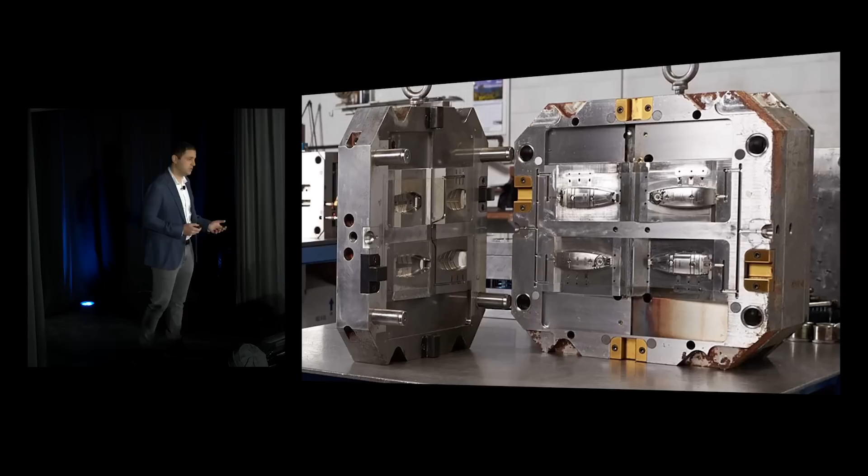I think it comes down to tools. This is an injection molding tool, and it's representative of a lot of tools in manufacturing. It's a big chunk of steel. It costs many thousands of dollars to make one. It takes many weeks. And you have to do all that before you even get one part out of it. Then if you want to change that part even a little bit, you've got to repeat that cycle, spend a lot of money, take a lot of time.

And so that inspires a conservatism to the world of making things. There's this phrase, measure twice and cut once. And that makes a lot of sense. If you're cutting a big chunk of steel like this, you want to get that right the first time. And so the whole culture of making the physical world is built around preparation, refining your idea, and all that before you make even a single thing. And that's a problem. I think this prevents us from making bold choices and moving quickly.

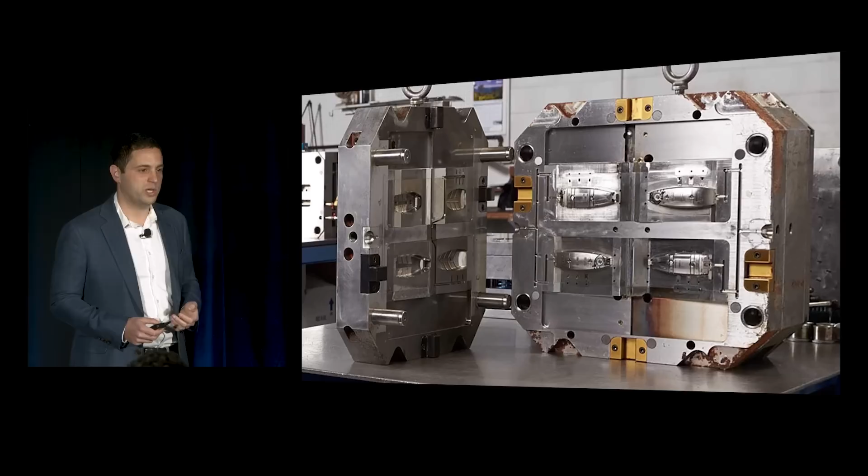In contrast, in software, the tools are very different. They're fast, reliable, low cost. You don't think about trying a line of code. You just run it. You don't think about changing it and iterating it the way you think about measure twice, cut once. In software, you do almost the exact opposite. You will often write two versions of something, ship them both, and then see how they perform with customers. It's called A/B testing. It's almost a complete inverse of measure twice and cut once.

So you might say, okay, well, software, hardware, they're different worlds. This makes sense. But I don't think they're so different. In both software and hardware product development, you're trying to do roughly the same thing. You're looking out into the world, finding a problem that needs solving, designing a solution, engineering it, bringing technology to bear, refining that, and shipping it. So how come we end up with this completely different paradigm?

I don't think it has to be that case. I think it's because of these tools. And if we had tools that let us iterate quickly and were reliable and produced the output that we expected, and we didn't have to worry about trying things, we could see some of these benefits.

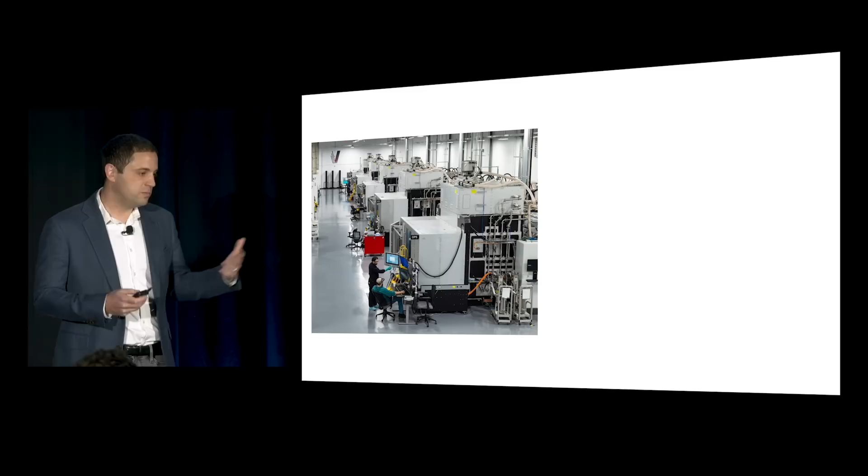So we set out to build something different, and that's why we started the company, to build the tools that make it possible for anyone to bring their ideas to life. And we've been working on this since the beginning.

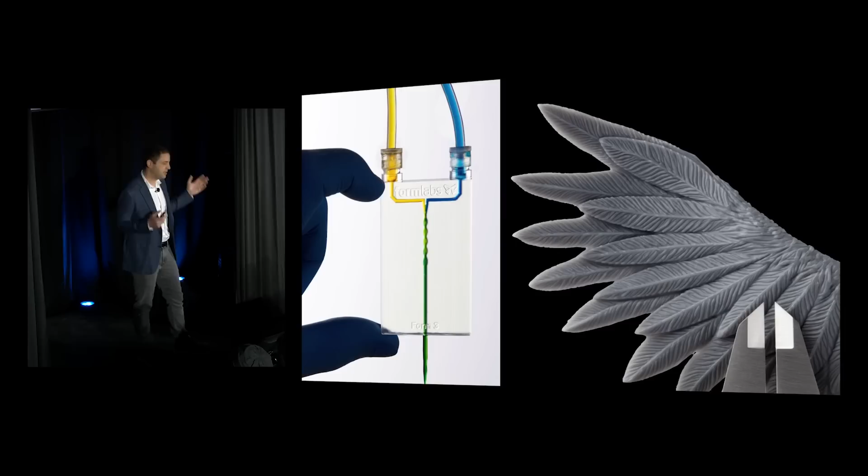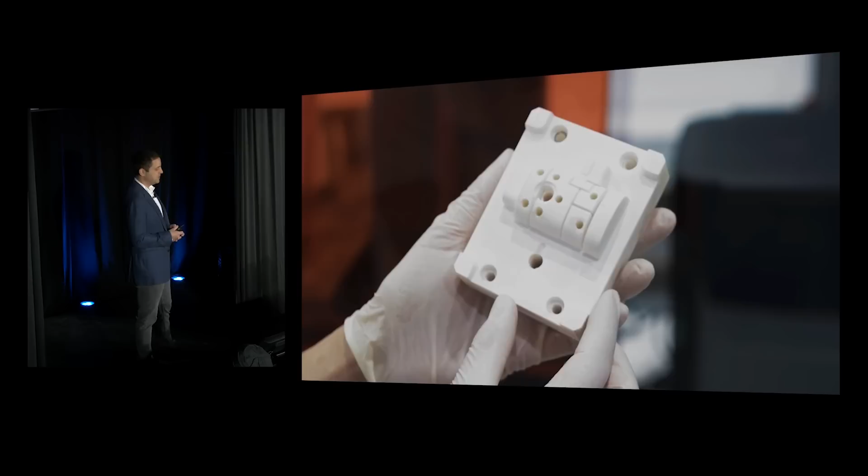We started with the idea of bringing powerful stereolithography 3D printing to a much wider audience, making it more accessible. Stereolithography makes high resolution, beautiful, detailed parts. Then on top of that, we added a range of materials: high impact strength, biocompatible end-use materials, tools you can even make an injection molding tool out of, silicones, and even high performance technical ceramics. So making our tools much more versatile and powerful through this range of materials.

And then we brought it all together with an end-to-end system where you bring your 3D model, and we have the software, hardware, post-processing, materials, everything you need to take that 3D model and turn it into a great part.

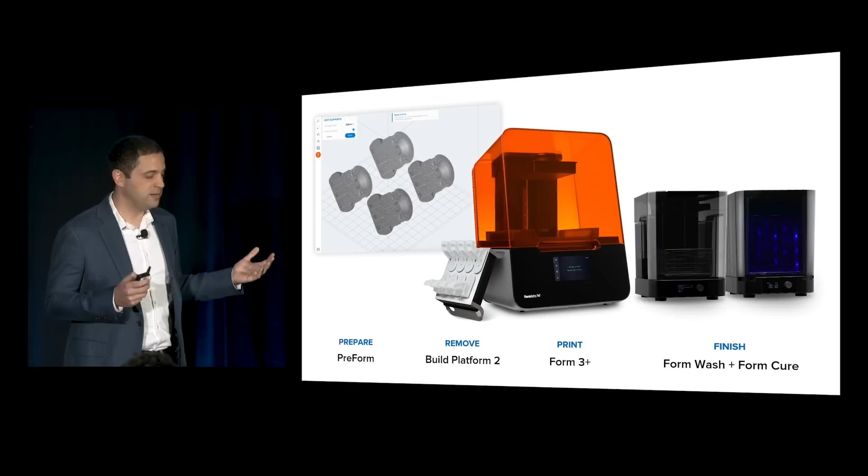The result and the feedback from the world has been awesome to see. We've shipped more than 130,000 3D printers. That's more professional 3D printers.

That's more professional 3D printers than any other company in the world. But it's not about the printers we ship, it's about what they do for people, and what they do is make parts. They've produced 300 million parts. And the reviews along the way have been great. People recognizing the work that we do to make an easy-to-use, reliable, high-quality system and make it affordable.

So we've been doing this over several generations, starting with the Form 1 in 2012. And it's an iterative process. There's a lot of work to do to make these great tools. So we got to the Form 2 and Form 3, we got to continue improving it.

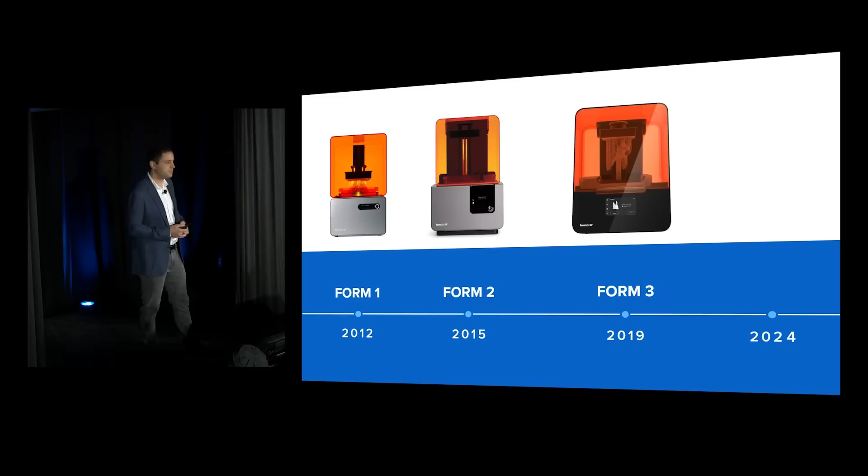But we're still just scratching the surface of making the hardware world more like the software world. There's a long way to go, and we need better tools to do it. So I'm excited to say that we've gone back to the drawing board to build a new generation of our stereolithography tool, to build a tool that works as fast as you can think. And today, I'm going to introduce to you the Form 4.

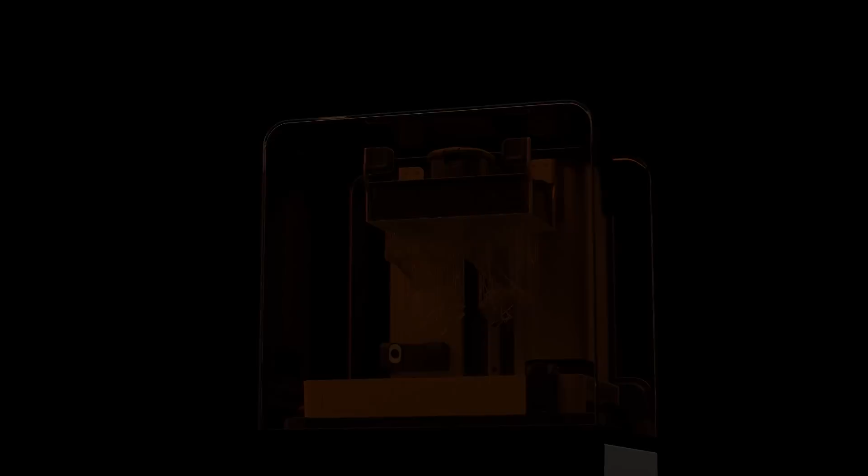It's beautiful, isn't it?

But that's not why we built it. This is a machine built for function and performance. So let's go see it print.

So when I got on stage and started the demo about 9 minutes ago, these printers started printing. The first job here is done. This is a dental arch build with 11 dental arches and completed in about 9 minutes. Looks good, so I'll just hit the thumbs up on the screen.

So over the course of the rest of the about 45 minutes that we'll be on stage here, the printers are going to keep printing, and we're going to keep turning them over. So you'll see how much 6 printers can get done in that time. Or you could think of it as how much one printer can get done in less than an 8-hour workday. And you're going to see a lot of builds pile up here.

So I'll invite Peter San Roma on stage. He led print testing on the Form 4. He's run thousands of builds already on this machine, and he'll do a great job of keeping these machines running.

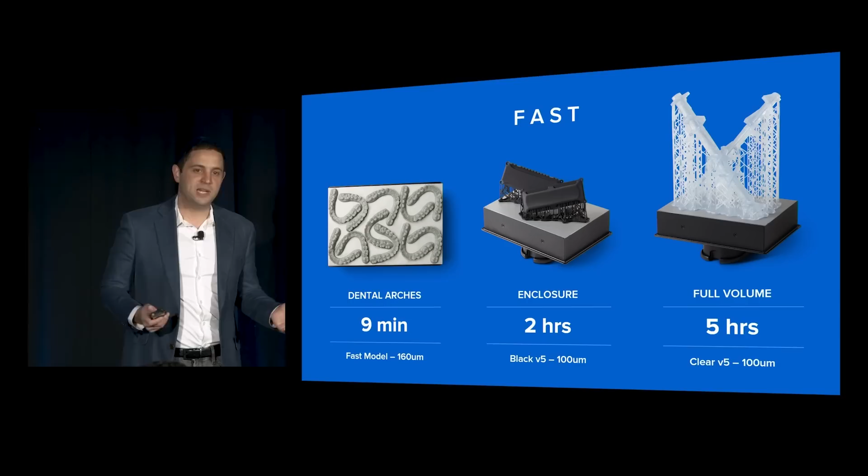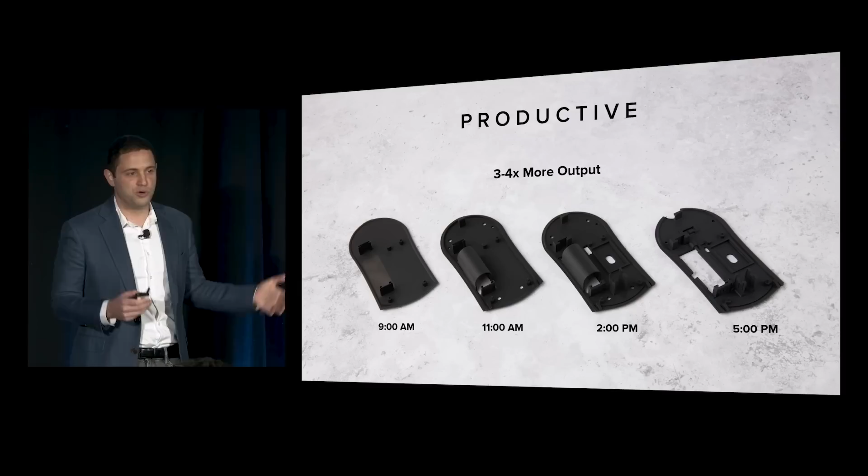So parts being done 3 to 4 times faster is great, less waiting. But that also means you can produce 3 to 4 times more - 3 to 4 times more productive. So in the time that you might have gotten one version of something done, you can now get many. And that means you can improve your design, get to a better result faster. This is physical A/B testing.

There's another way to look at the speed though, and that's throughput. And this is something I'm really excited about. If you look at the time per part, the way you might think about things in high-volume manufacturing with lots of parts, small parts now are in the minute range, and we have to start talking about seconds per part. Those dental arches, 49 seconds. Other small parts in a range of materials and layer thicknesses in that 1 to 2 minute range.

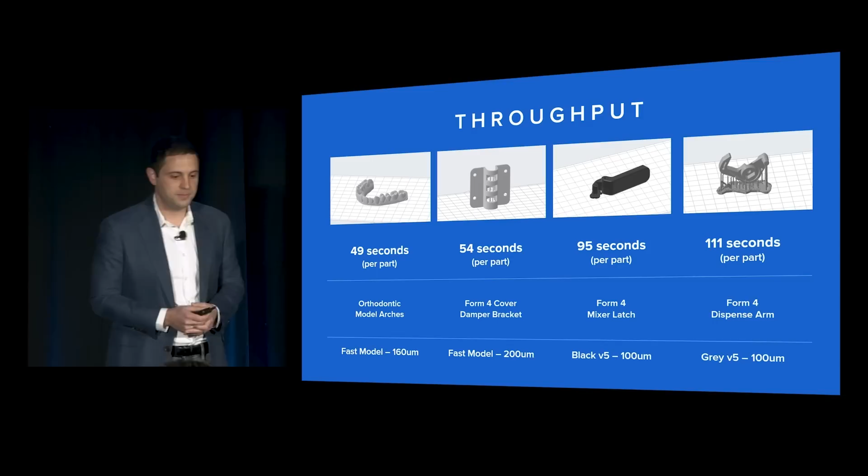So how do we make this possible? I want to go into some of the technology behind this. With Form 4, we introduced a new print engine called Low Force Display. The print engine is what we call the core technology inside a printer: the actuators, optics, sensors, everything that comes together, interacts with the material, and shapes your part. The print engine defines core print performance characteristics: speed, resolution, accuracy, materials range. So getting the print engine right is the core of building a great printer. With each generation, we get to go back and build a new and better print engine. You're always balancing these characteristics, but the goal is to push them all forward, and I think we've done that with Form 4.

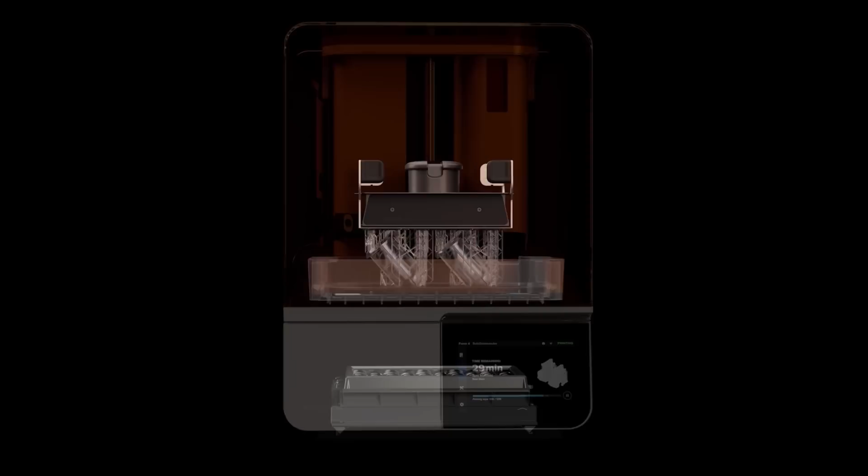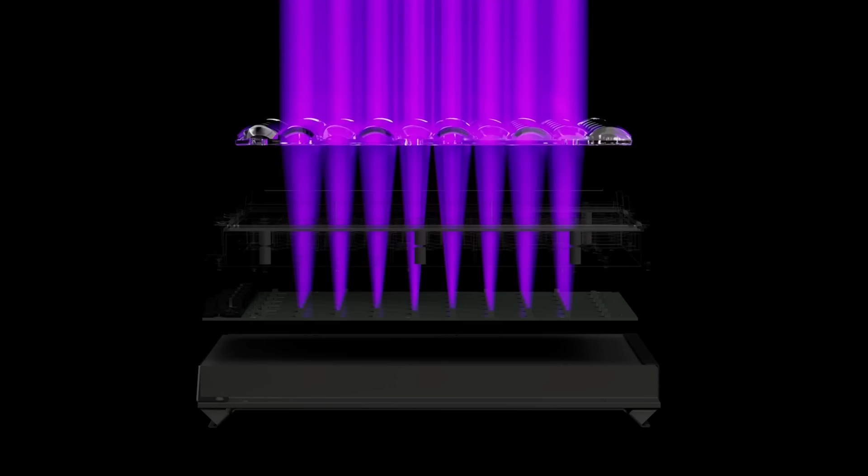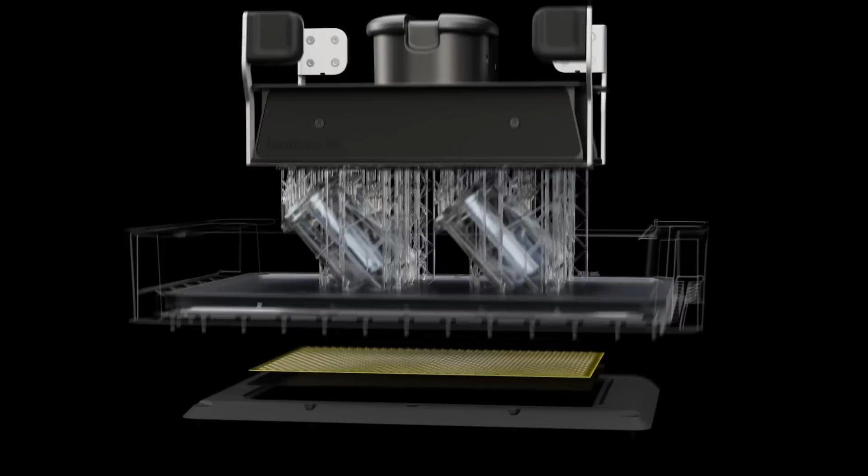Let's see what's inside LFD. It starts with the backlight unit, the BLU, which generates high power, collimated, uniform light, enough to deliver 16 milliwatts per square centimeter at the print plane, the highest in its category. Then that light passes through the light processing unit, the LPU, which shapes and modulates that light, forms the cross-section of your part. And of course, that process is repeated layer by layer to build up the part.

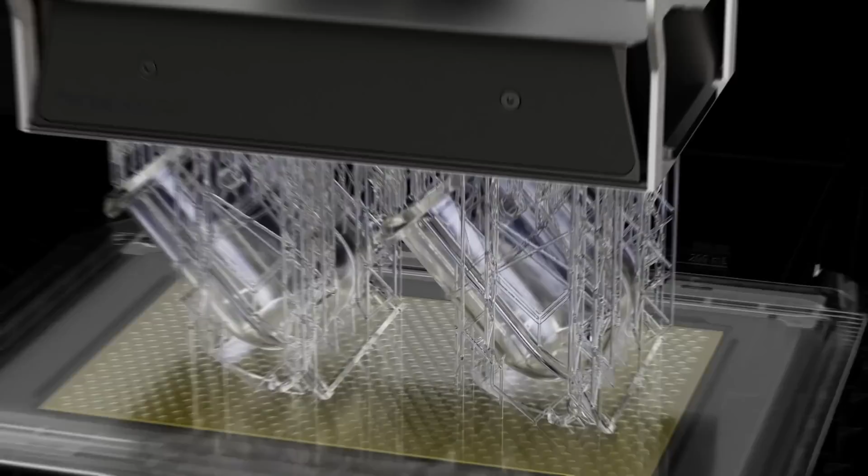On top of the LPU, we have a new release texture system, which reduces the peel forces involved in printing by 40%. This is really critical. The forces applied to a part in stereolithography can limit the size of the parts you can produce, can limit speed, or limit the quality. So bringing down those forces significantly allows us to have that combination of great parts, high speed, and large parts all in one system.

So let's look at an actual LPU over here. This is the LPU, and at its core is a liquid crystal display. LCDs have been used in 3D printers before. They offer a really great combination of resolution, speed, cost. It's a good technology to build on. But so far, they haven't been good enough for a professional system. They haven't been reliable or consistent enough.

Let's look at a typical LCD from another printer. This is actually how it comes to the user, and this is meant to be a user replaceable part. It's a bare LCD with a flex cable coming off of it, fragile and difficult to handle.

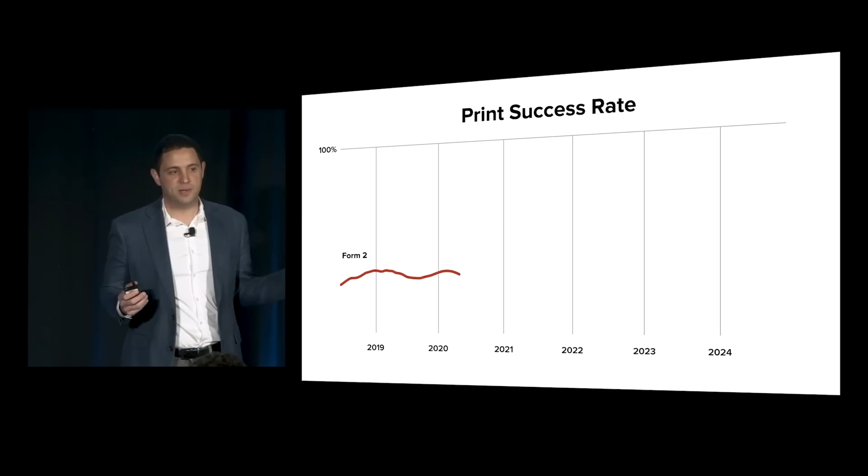I want to tell you a little bit about how we work on reliability. We track something we call print success rate. So when you saw me press the thumbs up and thumbs down on the screen of the printer, that's data that we use to track, is the print successful? This is the ultimate measure that matters for our customers. Did you get out what you expected? We started tracking this with Form 2, and we use that to inform a lot of design decisions and try to drive this metric up.

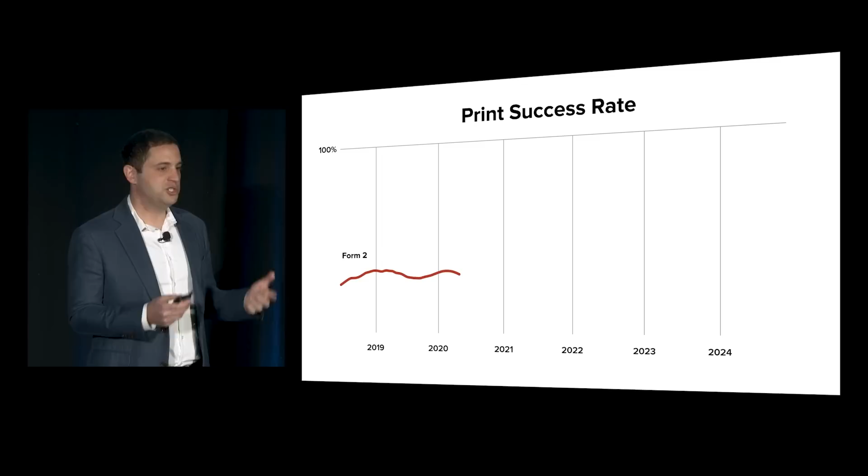With each generation of new printer, we get a chance to bring new, better hardware that can bring us to a new level in terms of print success. We did that with the Form 3. But on top of new hardware, what we can do with settings and software updates delivered to all of our customers is drive that print success rate even higher. So over the life of Form 3, we actually halved the failure rate, and we delivered that to every single person who has a Form 3 through these settings and software updates.

So now with Form 4, we get another chance to bring a new hardware platform that takes us to a new level. And I'm excited to say that from day 1, Form 4 is matching the print success rate of Form 3, and that's just the beginning. We're starting another cycle of continuous improvement through settings and software updates, and again, that's going to be delivered to every single person who has a Form 4.

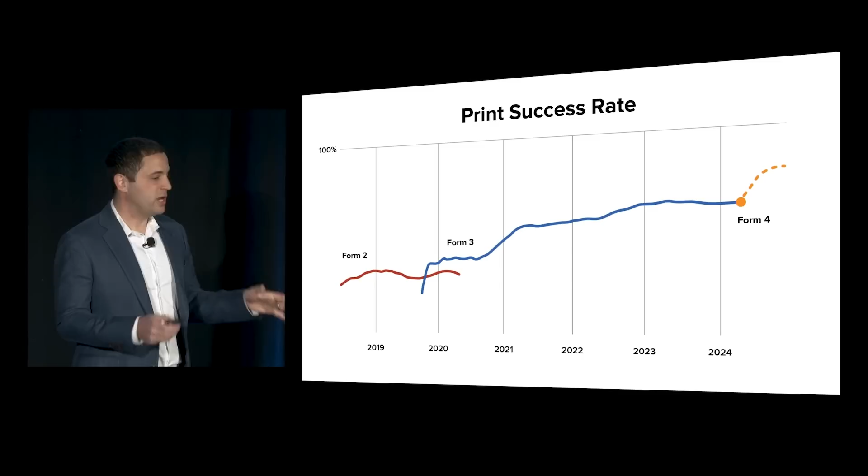So today we're announcing Form 4, but there's a few other new pieces to the ecosystem, and I want to dive into another one I'm really excited about: our next-gen materials. We have built out this range of high-performance specialty materials for different functions.

But today we're announcing new general-purpose materials. We went back to our most popular, highest volume materials and improved them, so they are harder, better, faster, and stronger. Our GPV5 materials improve on all of the main mechanical properties versus our V4 materials: higher strength, higher stiffness, higher elongation at break, and higher impact strength.

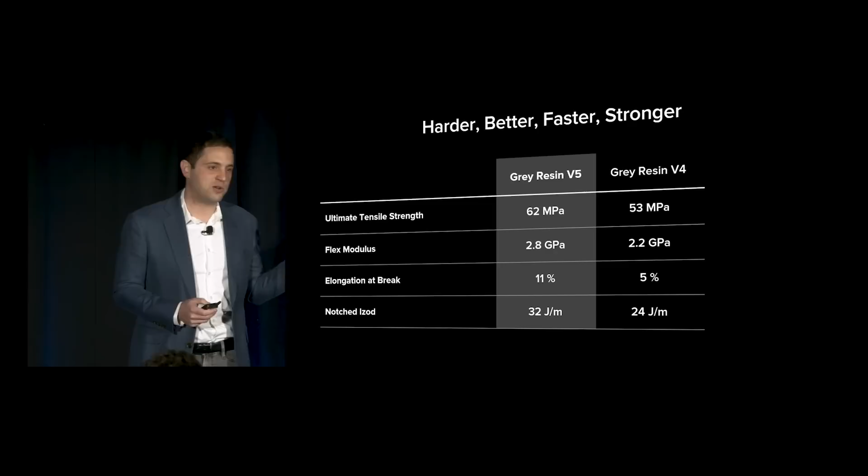This means tougher, better parts. In fact, we improved so much that it matches or beats our premium Grey Pro resin on all these major metrics. But harder, better, faster, and stronger is not enough, so we also made it cheaper.

GPV5 is starting at $99 per liter. That's 1/3 less than our V4 materials, or half of our Grey Pro material. And this is the 1 liter pricing—there's lower pricing available in volume.

So the new lower cost materials are a piece of what contributes to overall Form 4 having a 40% lower cost per part. We've got the new materials, we've got new lower cost and longer lifetime resin tanks, and then of course we have that 3 to 4 times print speed increase, which significantly reduces the amortized cost of the hardware.

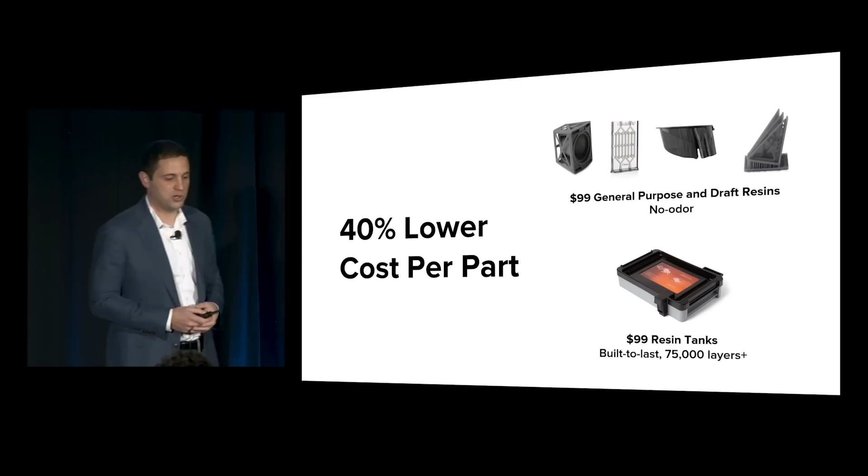So bringing it all together, Form 4 is fast, reliable, and affordable. And all that is built on this stereolithography platform that we've been building over the years: great high resolution, high detail parts, amazing materials, and an easy to use ecosystem.

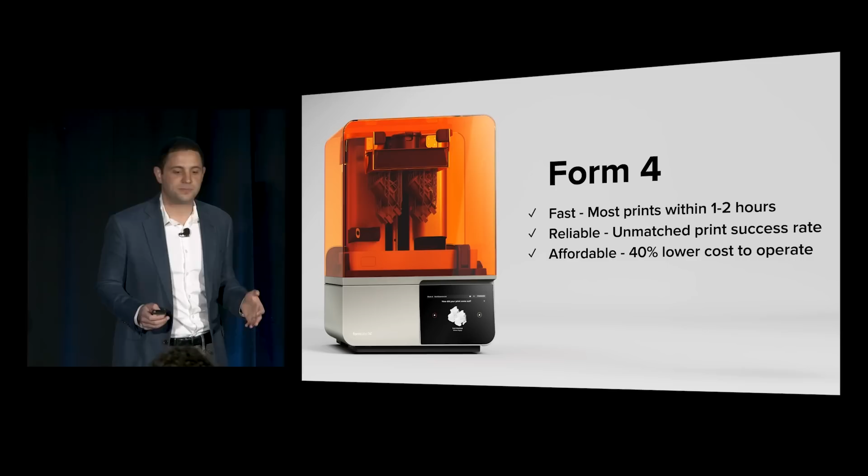Now, how much does it cost? We're introducing Form 4 at $4,499. And really excited to say that we're already in high volume production. That means that if you order today, deliveries start in 2 weeks on May 1.

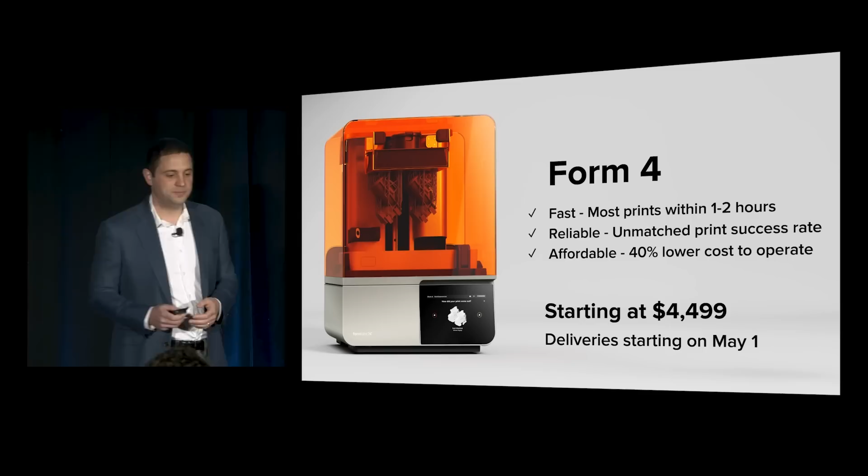So there's a lot more to cover, a lot more to dive into here. In a few minutes, David Lakatos, our Chief Product Officer, will come on stage, walk you through some more of the details and a workflow of using a Form 4.

But I want to leave you with one more thought about where this is all going longer term. So people often ask me, does Formlabs focus on prototyping or production? I've always struggled with that question. When I look at what we work on internally, we're making the printers faster, more reliable, lower cost, better materials. Those things are great whether you're making 1 or 1 million of something. And we've got customers that span that range, making 1 to millions of something.

But I understand where the question comes from. Typically in manufacturing, there's a huge divide between prototyping and production. You'll use different tools, different suppliers. It often happens on different continents. So there's a big leap when you're going from prototype to production.

But maybe it doesn't have to be that way. If we go back to the software world, we have these fast, reliable, low-cost tools. But I realize there's one more important characteristic that makes them the way they are, and that's scalable. A software engineer can write a line of code, and in the morning run it on their laptop, and in the afternoon it's running on hundreds of servers across the world, deployed to millions or billions of users. And it's doing that with one tool chain.

Wasn't this amazing? I am personally really blown away by this video. We have been innovating for the last 10 years, improving desktop SLA 3D printing. But to see the leaps that we've made here to match the quality and the speed of injection molding, to me, this is really mind-blowing.

So we're going to have a little bit of fun here. Max introduced the vision and the long-term where we're going. I want to dive a little bit deeper into how we got to this product and how you use it.

The Form 4 is the culmination of a lot of years of work and a lot of experience. We have over 130,000 printers out there, 300 million prints, and we're learning from this continuously. 75% of our printers are constantly reporting to us, which means we know what things have problems and what things are succeeding. We have also conducted a lot of interviews, and then we made a big investment. We spent the last 3 years, over 100 engineers' time, built 350 prototypes to come up with this product right here.

I think it's nice to talk about these things, but since we have a hardware product, the best way to walk you through it is really to show you how it works. So in the next 15 minutes, I'm going to get you all to be expert users of this product. I'm going to leave in 15 minutes, and you should be able to get going.

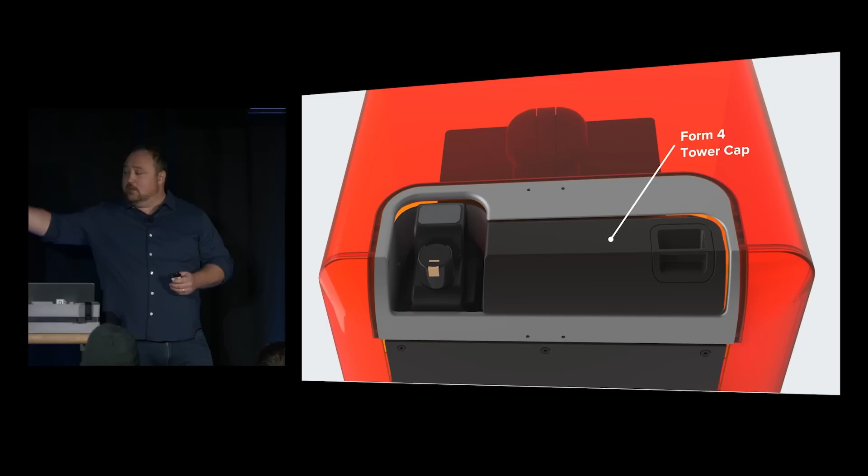This is the Form 4, and we're going to be printing a component on it, the Form 4 tower cap on the top. As you can see, it's a relatively large part. In fact, if you try to put it on a Form 3, it fits, but it barely fits, and you have to angle it up. Many people might know that if you angle something up, it usually takes quite a long time. We made the Form 4 30% larger.

But we also made an inside change, looking at all of that data. Most parts that you're printing are not rectangular, they're longer on one axis. So we've elongated the build area to be longer on one axis. We have 22% larger parts that can fit on that, which is awesome.

And yeah, this is the Form 4. It fits on any engineer's, product designer's, or healthcare professional's desk. We have a wide range of customers, and we created a universal product that can really work well in a number of different applications. But it also means that we need to train a wide range of customers, so we need to make it incredibly intuitive. And the intuitive design starts with the UI itself.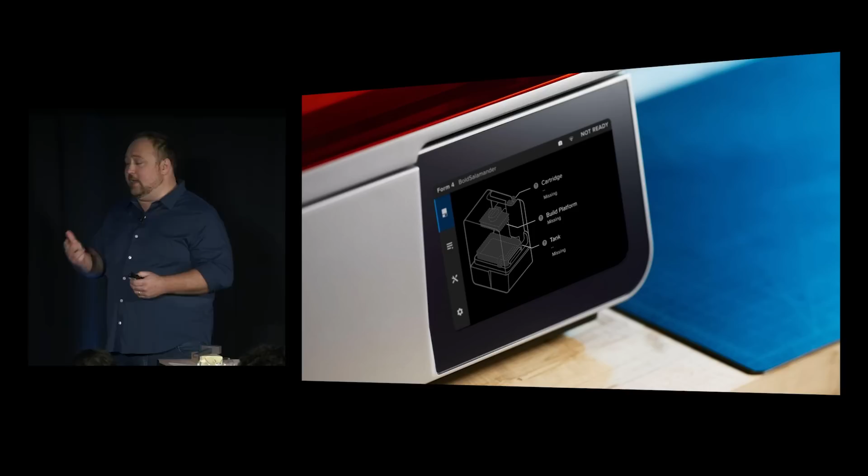As you can see, there are 3 things that I need to start a print: a build platform, a cartridge, and the resin tank. I'm going to insert all of these and talk a little bit about how we design them.

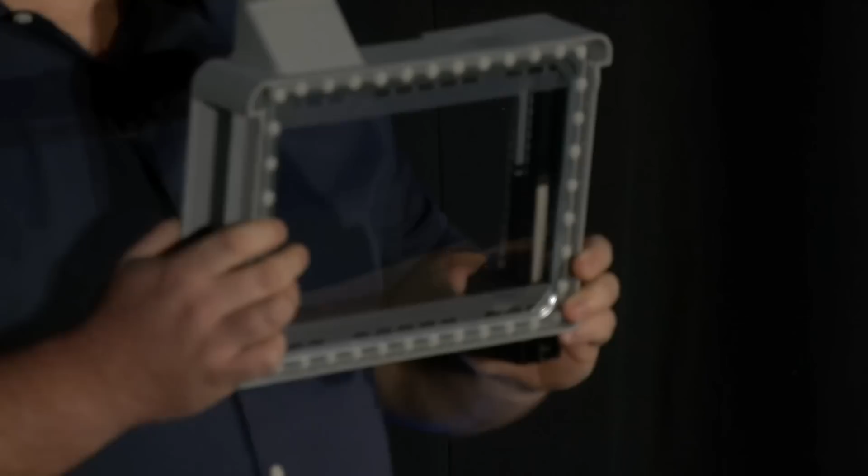I'm going to start with the resin tank. You can see the resin tank is designed to be stackable. This is important if you're using a lot of different types of materials, so it takes up the least amount of space on your desk. If I pick it up, you can see it has a flexible film on the bottom. In fact, it's a dual layer design. On the bottom, you have a layer that ensures there are no punctures or scuff marks that can inhibit printing. And on the top, it's flexible, which allows us to not have a lot of force on the parts themselves, which usually leads to print errors.

This is something a lot of other printers don't do, and because of that you need to constantly change them. These print tanks are able to withstand more than 75,000 layers. Another thing you might notice on the bottom is a metal frame. This is important because it keeps the film on the tank stretched and ensures a high print success rate.

Last thing about it is a mixer. This is something you might have seen on our previous printers as well. It ensures homogeneous resin inside the resin tank, and if there's any errors or debris in the tank, it detects it and pauses the print so you can catch it.

Let's insert it. I'll open up the machine, and it fits right in. Locks in with 2 latches, and then I can secure the mixer.

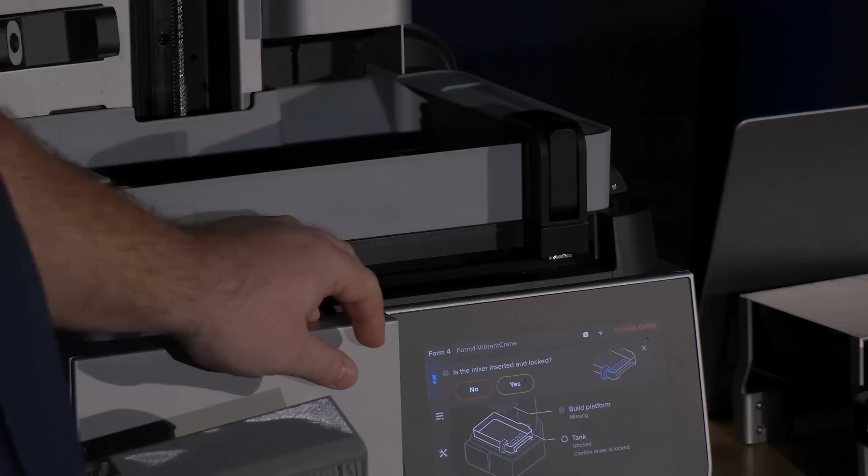You might have noticed that the printer prompted that I inserted something. This is really important because we keep track of all accessories and everything going on inside the printer. It ensures that if you have a print, we're matching the resin tank, the cartridge, and the build platform to it. I'm going to confirm that I've inserted a mixer as well. Next up, I have the build platform.

The build platform, we call it Build Platform Flex. You will never guess why it's called Build Platform Flex. This ensures that I can instantaneously move parts once a print is done. I'm going to insert this one as well.

I'm all done inside of the machine, so I'm going to close it. Last one up is the cartridge.

We have redesigned the cartridge from the bottom up. We looked at a lot of comments from our customers. We wanted to make sure that you can start the print instantaneously. So this resin tank and the assembly inside of the machine is able to fill a completely new resin tank under 5 minutes, so you can start prints immediately.

We've also designed it with sustainability in mind. You have more than 60% reduction in the plastic waste that this part produces, and it also has a smaller footprint. So if you have lots of resins in a scenario like a production scenario or a dental lab, you're able to stack a ton of them next to each other on the shelf.

I'm going to insert this one as well. Great, you can see that I've inserted the build platform and the resin tank as well. We are ready to go. The printer right now is in ready to print state, so if I send a new print to it, it's just going to start automatically.

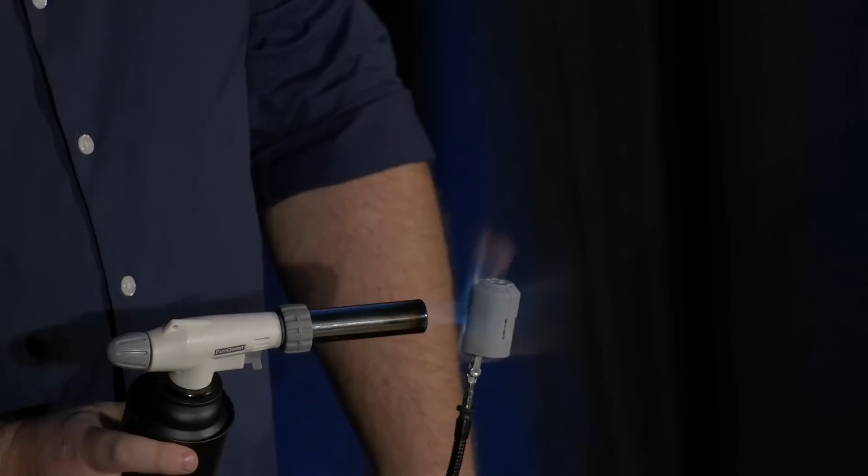All right. Okay, let's see. So it should extinguish very quickly, so pay close attention. And, all right, but it didn't even catch fire. All right.

Next up, I want to tell you a little bit about how to start a print. So we're going to switch over here to PreForm, and once it's up on the screen, I can walk you through a full print. So first of all, we're going to choose a printer. My printer is called Vibrant Crane.

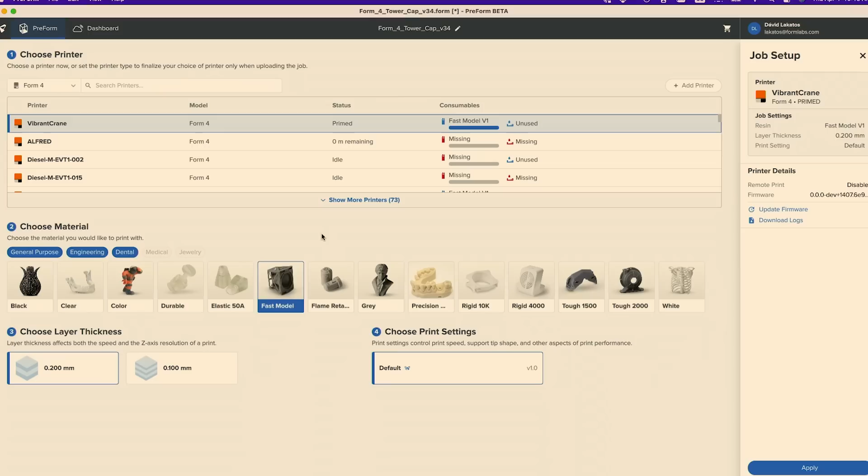This is a really cool notation. We call all of our printers after an adjective and an animal. And once I chose it, I have a list of options for materials. Today I'm going to choose our new fast model material. Once I apply it, you can see that I have a Form 4 sized build area, and I'm going to choose the tower cap.

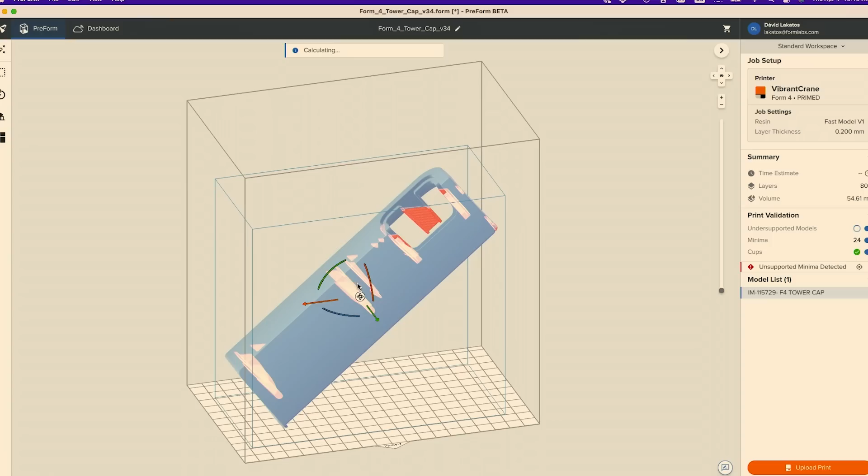You can do a couple really cool things here, but today I'm going to simply orient it. Once I've oriented it in a situation I like, I'm going to ask the printer to generate supports.

This is going to take about 20 seconds. Support structures are really important for inverted SLA printers because you're printing upside down, so any unsupported minima would fall off the printer. While this is generating, I'm going to take a look at what's going on with the printers.

Peter has been doing a great job here. We already have 6 build platforms ready to go, and 6 times about 7 parts, so we're already in the 40 to 50 parts area, which is great.

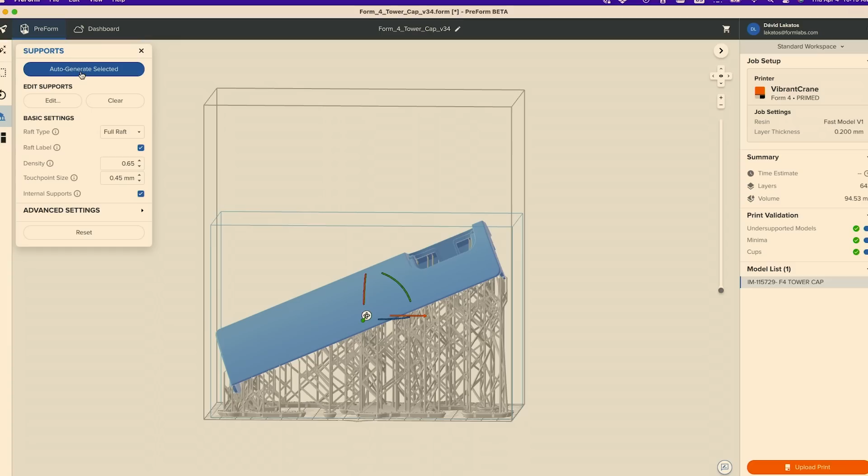And this generated in the meantime. I can take a look at whether I like all the orientation and whether there are any parts that I don't want to support, but it looks good to me. I can take a look at how it would be printing, which is a really nice visualization, and I'm able to send it now to the printer.

So once this print has been sent, it's going to automatically start the print, which is ready to go.

Switching back, I'm done now. All of the accessories are in the printer. The print file has been sent. Once the print is uploaded, it's going to start.

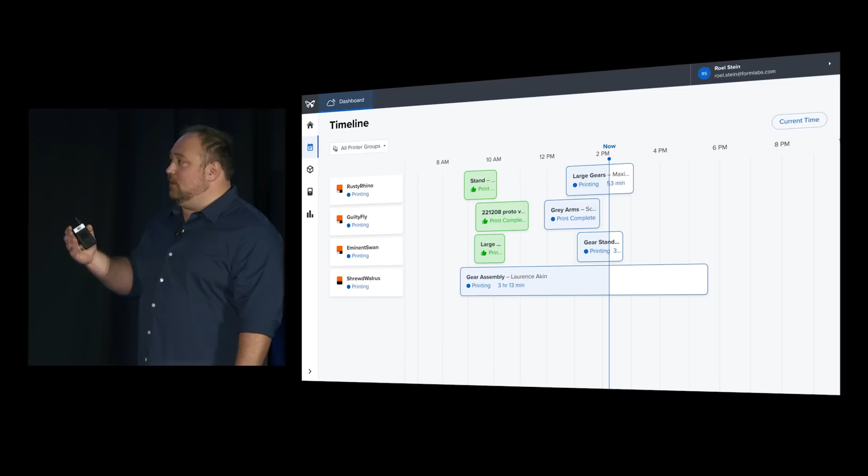This is a common time to go back to Dashboard. This is our online product where you can track all of the prints, all of the accessories. You can take a look at if there are accessories that you're about to run out of, and you can even schedule prints ahead of time, which is a really cool feature.

But you don't have to worry. We have designed the machine around reliability, and we have sensor loops inside of the machine constantly tracking what's going on inside of the printer.

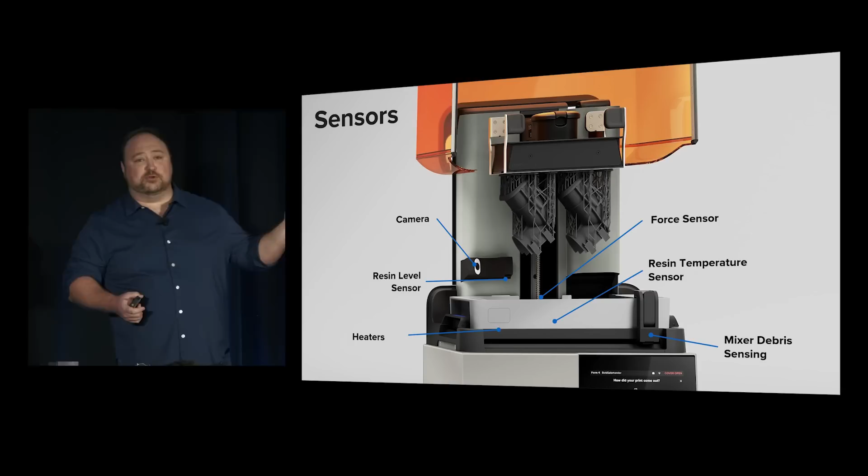We have force sensors on the build platform. We have the mixer checking for debris, and amongst other things, we also have a new feature, a camera, that allows you to take a look at your printer anytime you wish.

There's another thing that you can do with it, which I really love. You can take beautiful time-lapse videos like this.

We had endless debates about who will be interested in this, but I have a hunch that everybody will love this feature, and I cannot wait until all of you are sharing your hopefully not secret projects online with all of us.

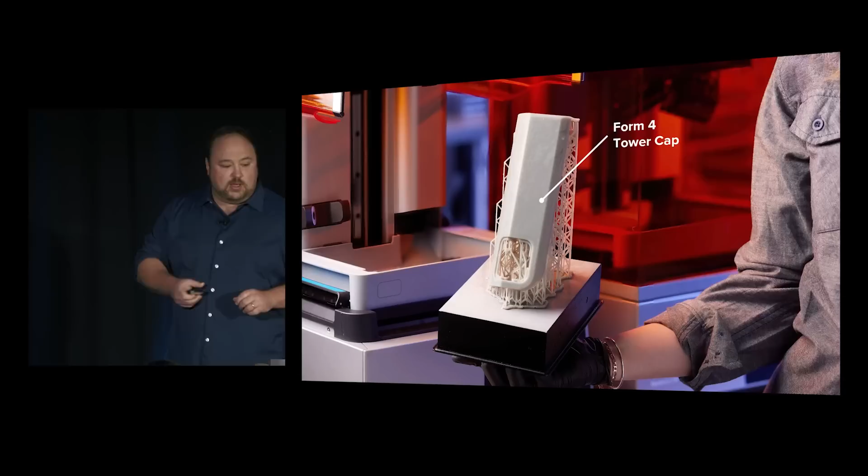This print is going to take about 1 hour and 30 minutes or so. So I've cheated a little bit, and we are going to fast forward to the next steps.

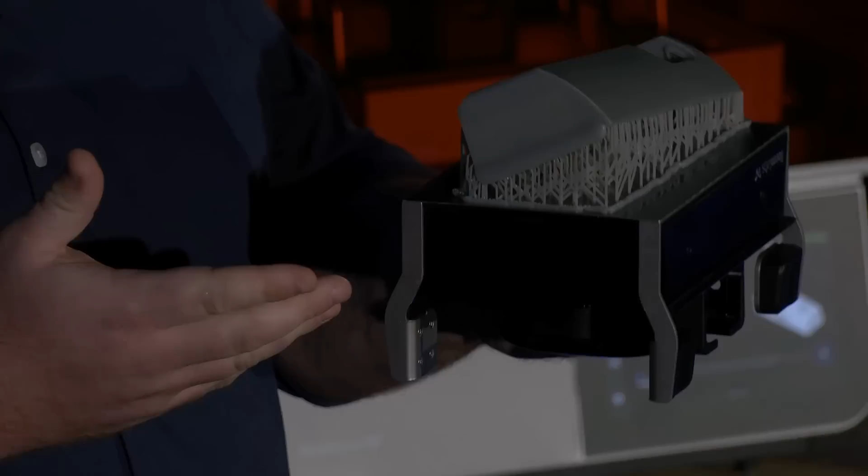After your print is done, you get something like this, a beautifully rendered part on the Build Platform Flex. I'm not going to remove it yet.

I'm going to put it into the next step, which is a wash station. This is called Form Wash. Form Wash has been updated to fit the Form 4 size, and it also has a 67% larger volume inside the machine.

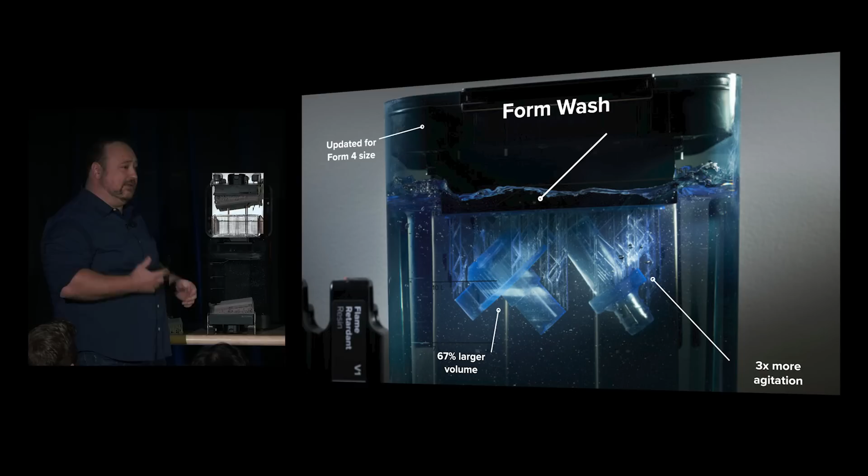That means you need to change IPA less frequently, which is something a lot of our customers requested. It also has 3 times more agitation, which means all the nooks and crannies are going to be nice and clean by the time this is done.

So this is going to take about 5 to 10 minutes. We're going to jump ahead in time one more time, and now I have a washed part ready to go.

This is a great time to remove it from the build platform. Just so you can see how effortless it is, I can pretty much do it in midair. And you have the part ready to go.

The next and final step is going to be curing the part. I'm going to insert it right into the Form Cure and set it up with the presets that we recommend.

Curing is an optional but essential part of the experience because it locks in the final material properties and really gives the part its final form.

Once this is done, let's skip forward. I have a fully washed and cured, ready-to-go part. But this is not my final part. I still have some support structure on it.

This is an essential and really cool part of the experience. We call it light touch supports. It's an optimization between hardware, materials, and software that allows us to balance print success rate with ease of removal. So I should be able to do this live as well. What can go wrong?

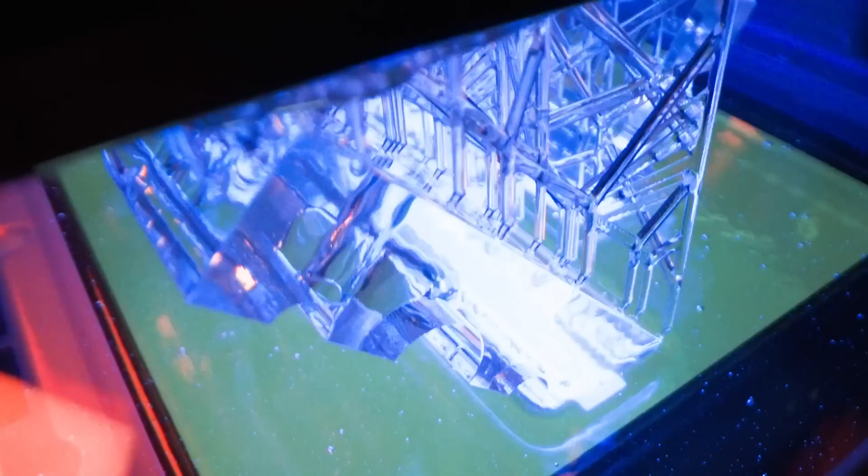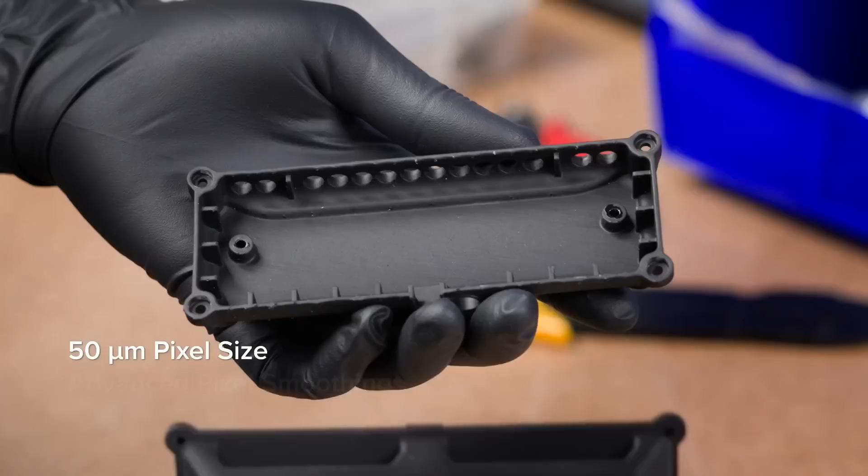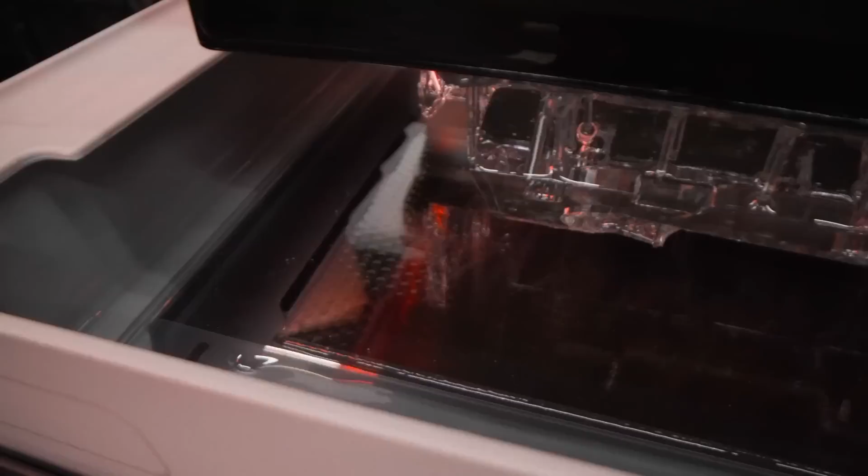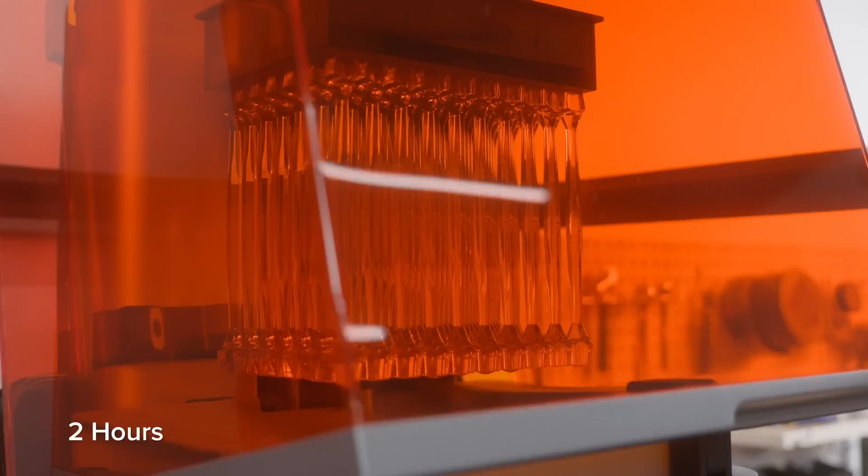Introducing Form 4. So fast, it will change the way you work, with most prints in under 2 hours. Iterate several times a day with a proprietary release texture, flexible film tank, and ultra-high optical power. Produce parts that always fit, rivaling injection molding with 50-micron pixels, advanced pixel smoothing, and light touch supports. Achieve an unmatched print success rate with validated print settings, precision heating, force sensing, debris detection, and remote monitoring. Tackle any problem with industry-leading materials, with an upgraded mixer and dispense system that support highly viscous and filled resins. And do it all with a workflow anyone can learn in 15 minutes, with instant material changes, comprehensive software, and automated post-processing. Enter a new era of performance, built on our next-generation low-force display print engine, featuring a high-power backlight unit, light processing unit 4, release texture, and a flexible film tank, delivering extreme speed, reliability, and print quality. Now, anyone can perfect their products, keep production running, or improve patient care. The tool you've been waiting for, Form 4.